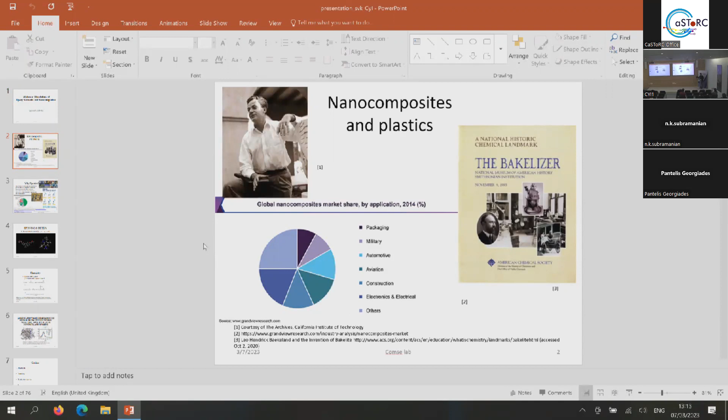But first, I would like to say some historical points. Yes, sorry. Okay.

The first who introduced, at least indirectly, nanoscience and nanotechnology was the great physicist Richard Feynman, when in 1959 at Caltech, at an American Physical Society meeting, he gave a lecture titled "There's Plenty of Room at the Bottom," where he mentioned the advancement of science and technology if we were able to manipulate molecules and atoms. In his opinion, one day humanity would be able to put the whole Encyclopedia Britannica on the head of a pin.

The scientific community agreed that that was the historical point where nanophysics and nanoscience were born. Another historical point is the first mass-produced nanocomposite, which, according to the American Chemical Society, is bakelite, invented by Leo Baekeland in 1907 in New York, when he invented the condensed polymer of formaldehyde and phenol. Due to its amazing electrical and thermal properties, it was a must for everyday household needs.

Now, as you can see from the chart below, the nanocomposite market is huge, and it is linked with a very specific, wide range of applications like military, automotive, packaging, electronics, and many more.

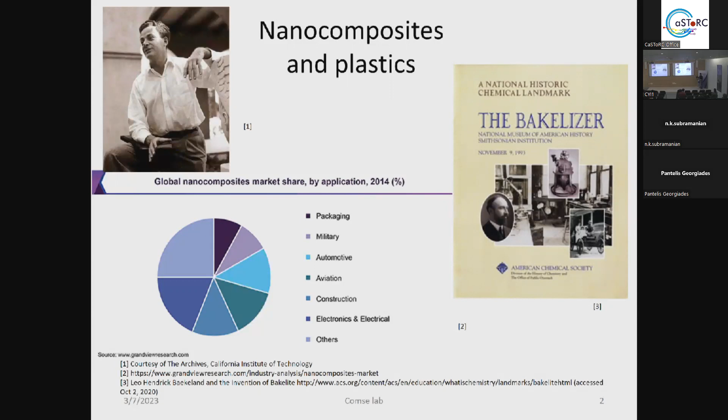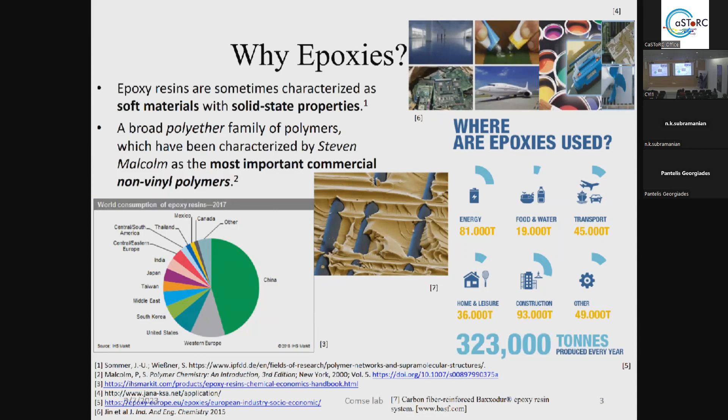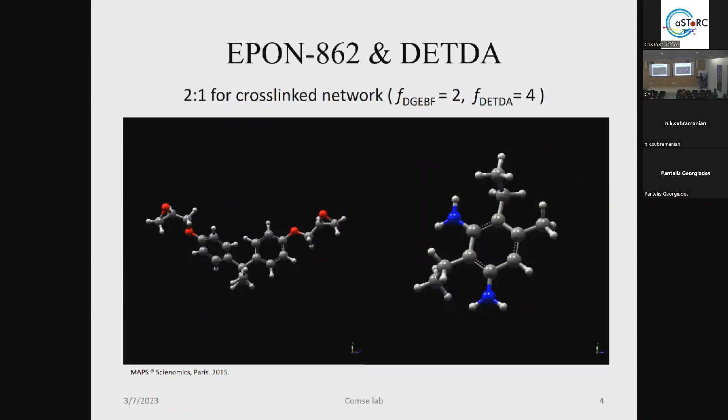Now, this is the epoxy molecule that we want to polymerize, as we say in polymer physics. But in epoxy resins, the polymerization happens with the help of another molecule, the hardener, in order for the cross-linking process to happen. As a hardener, I chose this molecule, called DETDA, and it has functionality 4, due to the 4 hydrogen bonds that the amine types are able to create.

You can see here the chemistry of the cross-linking process, and that it is a 2-step reaction. First, the amine of the hardener goes to the epoxide, and they form the first step of the subnetwork. The epoxide edge opens and takes the amine, and then this product links with another epoxide of another epoxy monomer, and that's why we need 2 monomers for 1 hardener. The ratio is always 2 to 1 because of the functionality 2 to 4, giving the first subnetwork after the 2-step reaction.

Of course, this happens again and again in order to have a big, fully cross-linked network. Now, the first step of the research was to study a fully cross-linked network and to explore the topology, the elasticity, the dynamics, and the structure of this network.

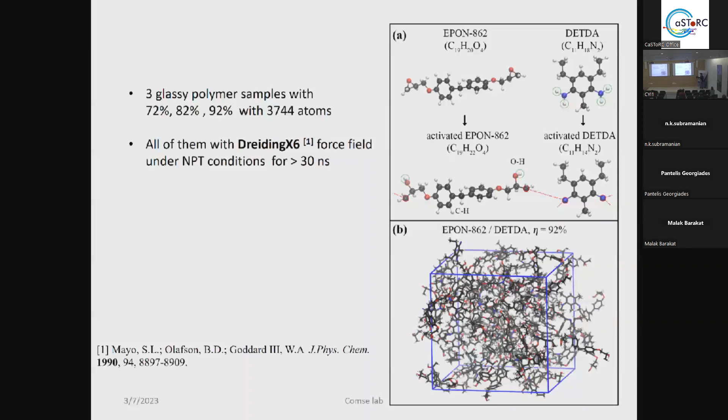Also, yes, also the cross-link degree and the hardener. No, this is the problem. And in computational studies, another problem is to find the same force field, and of course the same parameters, as I told. So at the end of the day, it's very difficult to find exactly the same system in terms of chemistry, in terms of cross-link degree, and in terms of force field if we're talking about computational systems.

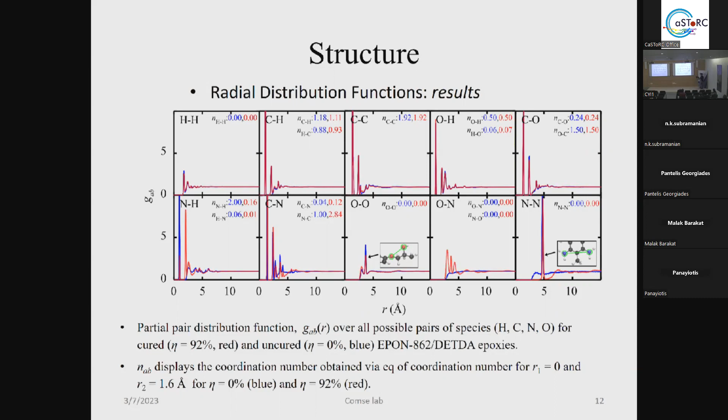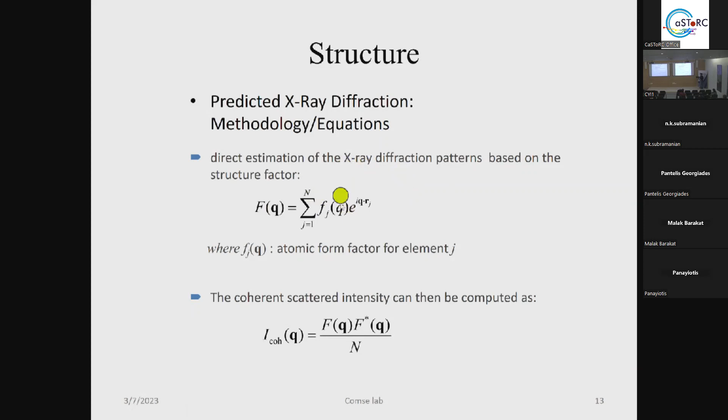And after that, taking into account the partial g(r), we were able to calculate the theoretical XRD diffraction. Now, because of the small system size due to the molecular simulation, we did that with 2 different methods. The first is the direct estimation of XRD, taking into account the structure factor. And the second is taking into account the partial g(r), as I told you before.

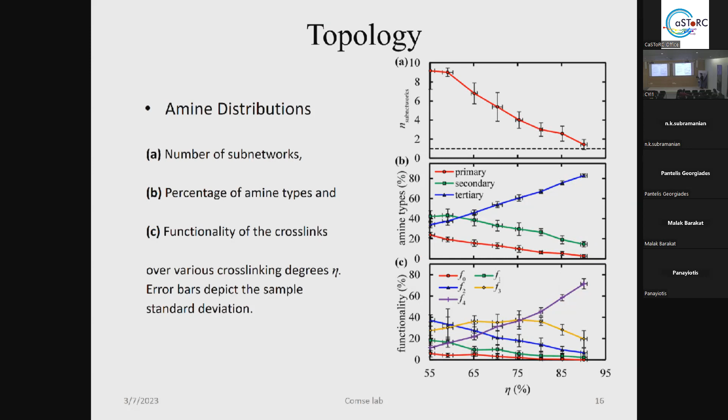Afterwards, we calculate the elasticity of the system in 3 different ways, in order to decrease the error bars because of the small size of the system. With volume fluctuations, with tensile stress-strain experiments, with 3 different strain rates and 3 different directions in order to take out the errors as far as possible, and with the Parrinello-Rahman method.

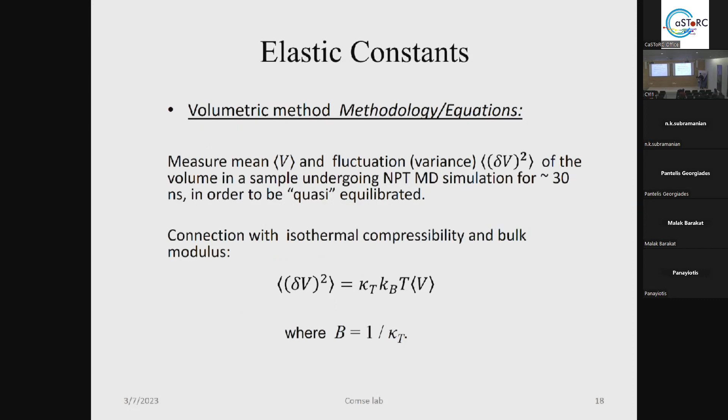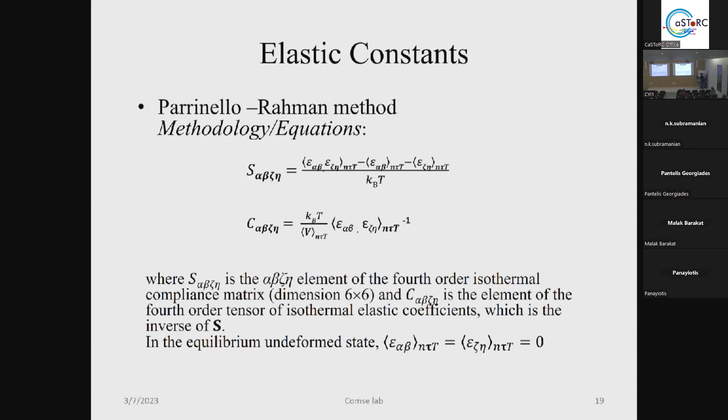As regards the volumetric method, we took into account the fluctuation of the volume, and from this we were able to calculate the isothermal compressibility, and from this the bulk modulus. As regards the Parrinello-Rahman method, we calculate the compliance matrix through the strains of the system in the equilibrium undeformed state for more than 70 nanoseconds of molecular dynamics equilibration run. In that case, these two parts go to 0 because of the undeformed equilibrium state, and thus the compliance matrix takes that form and is more elegant and easier to solve.

Of course, we... excuse me for that, I don't know how to, okay.

Of course, we took into account the Lamé equations in order to get the bulk modulus and shear modulus from Parrinello-Rahman, because from Parrinello-Rahman and the compliance matrix we get only the Poisson ratio and Young modulus. Here you can see all the values from all the methods for these 3 different systems, 92, 82, and 72. In bold, I have the agreements between the methods and the experimental.

We can see, for example, that at 72% we have an agreement in Young modulus and Poisson ratio between the stress-strain and the Parrinello-Rahman. Also we can see that here, especially in the Poisson ratio, at 82%, and happily also in the shear modulus in the fully glassy system, between Parrinello-Rahman, stress-strain and the experimental.

We know that the Parrinello-Rahman method is a very sensitive method because it is a statistical mechanical formula and transfers the errors that we may have from the thermal fluctuations to the values. And after this, we have bigger errors from the error propagation. Why am I saying all this? Because in some cases we can see extremely high errors like this. For example, it's double the value. And this happened because of the very sensitive method that transfers this sensitivity through the fluctuations, and of course the very small size of the system.

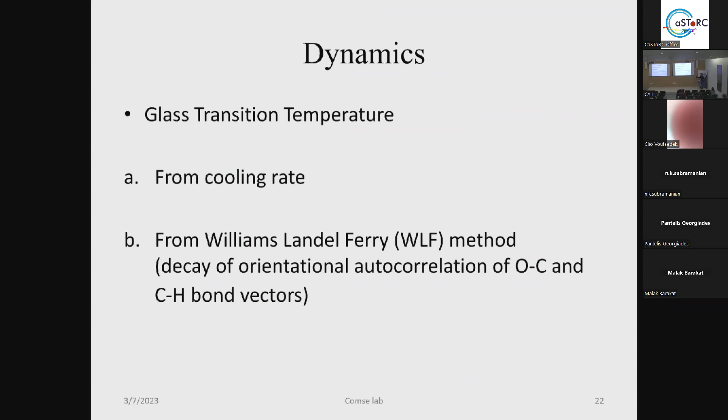Also, we studied the dynamics of this epoxy network in two different ways, with the cooling rate and with the WLF method, taking into account the correlation functions of the vectors. The cooling rate method we used was to cool the system at 1 Kelvin per 200 picoseconds, which is of course a brute force method compared to the experimental way people do in their laboratory, about 1 or 10 Kelvin per minute. But people doing simulations know that the experimental rates are very, very slow, and we weren't able to reach them.

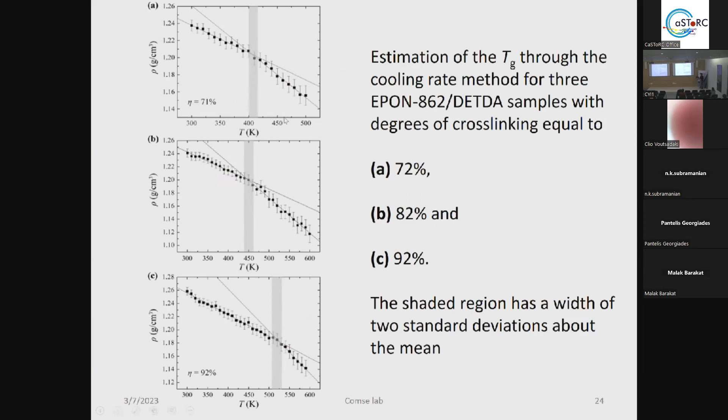So in order to have reasonable times, we used that brute rate, and compared the density versus temperature after that. We can see here the three different plots for the three different systems, and we can see the change of the slope here with the shaded region, the width of two standard deviations.

After that, we did it in a second way, the WLF method, taking into account the first and second Legendre polynomials of the epoxy segments OC and CH, in order to see how these two bond vectors behave, and so to have a bigger picture of the dynamics of the system.

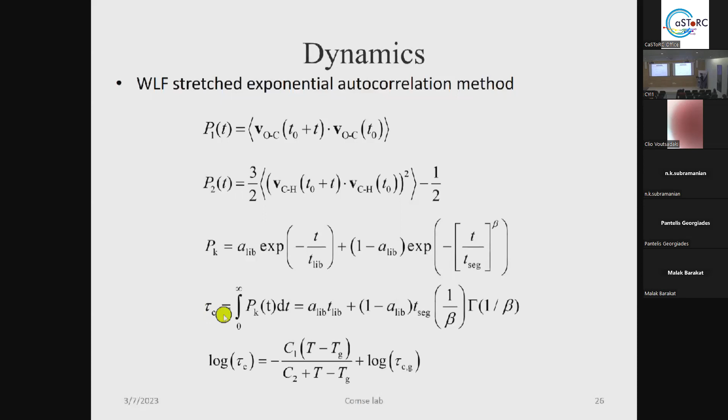You can see here the first and the second Legendre polynomials of the vectors that we take into account, and from these we take parameters in order to parameterize this equation, parameters like a-lib, which is the parameter for libration of atoms around their skeletal bond, and the characteristic times of this libration, which are t-seg and beta. From these parameters we calculate the relaxation time, and from the relaxation time we calculate the Tg.

So here we can see all the results for the two different methods. You can see here the WLF for the two bonds, and here the cooling rate results. And after that I applied the Ferry approximation, which was introduced by J.D. Ferry, who said that from these brute force cooling rate methods we may have some errors, typically numerically speaking. In order to minimize these errors, I applied the approximation, which depends on the order of the cooling rate, in order to have the final values with the least possible errors.

And of course, at the right, you can see the experimental values. Interestingly, with the brute force cooling rate method we have quite good agreement with experiment. In contrast, the WLF method, although it has qualitatively good results, quantitatively has some variance from the experimental values, and the reason is again the sensitivity of the method. The more sensitive the method, the bigger the error transferred to the final values, especially with small systems like the ones we had.

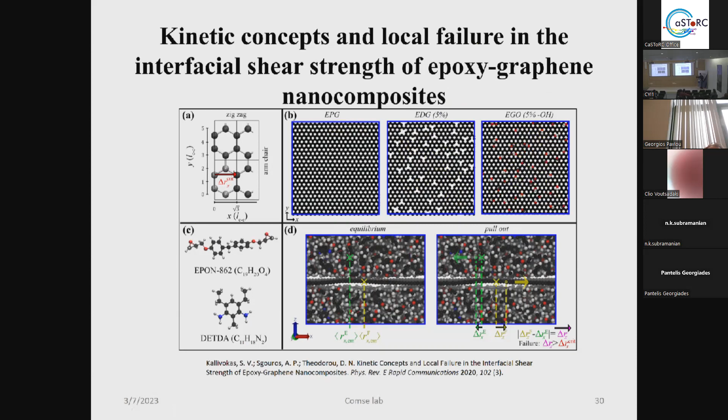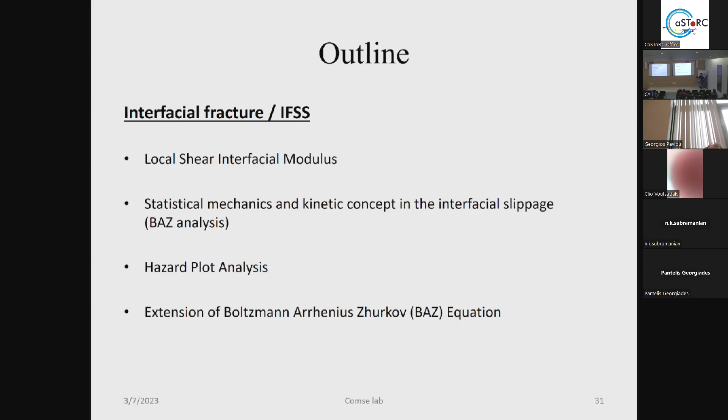The main target of this research was to calculate the interfacial fracture, or what people doing fracture mechanics call the interfacial shear strength. We took these 3 systems at 82% crosslinking degree, with bigger systems this time of more than 15,000 atoms, with Dreiding exponential-6 as a force field, and we equilibrated for more than 70 nanoseconds under NPT conditions.

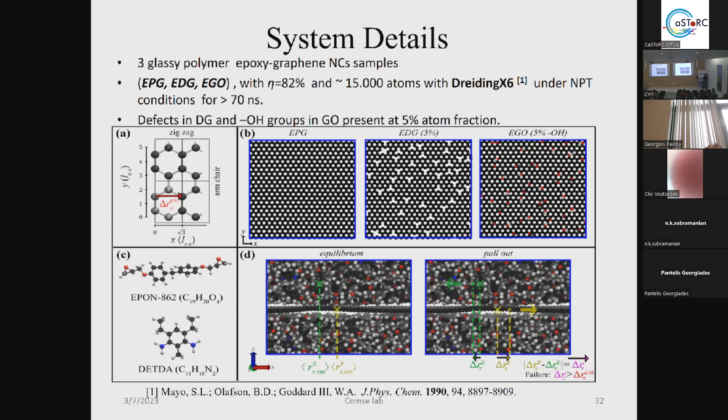The first thing we were interested to see was an interfacial constant that people doing experimental fracture mechanics, especially at the macro scale, measure: the Winkler modulus, which is a modulus that explores the interface of 2 different systems. Usually, one finds this constant in geomechanics or civil engineering systems.

So we were interested to see if this interfacial constant would be able to see that here. But here, of course, we have a molecular system and a different point of view. So we constructed this Winkler molecular-level constant the way that I show you here, and we define this constant as the local shear interfacial modulus. It depicts, let's say, the adhesiveness of the interface between the epoxy and the graphene. And we calculate this for different temperatures and for the 3 different systems.

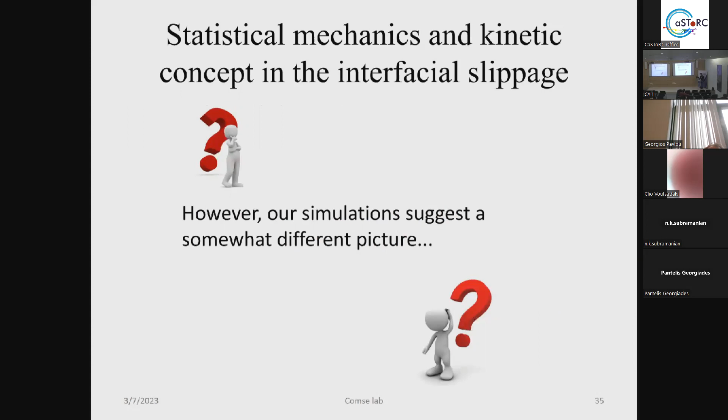I mention this because we had a somewhat different picture of the system. The limit time, the tau lim that Zhurkov saw, was in the order of 10^-13, the oscillation of atoms. But we saw, at least in the epoxy pristine graphene, 2 orders of magnitude bigger. So we saw a numerical, let's say, disagreement.

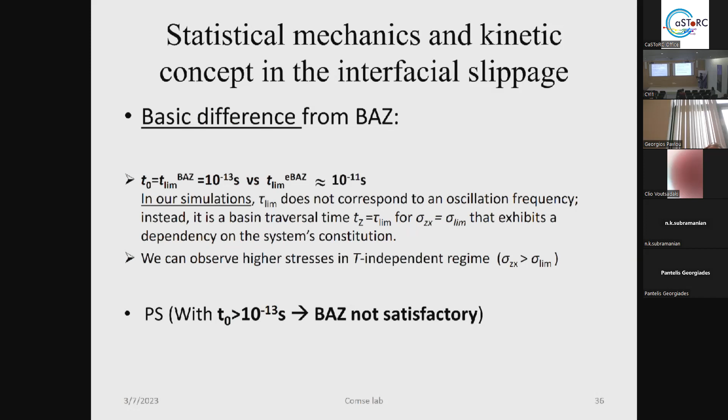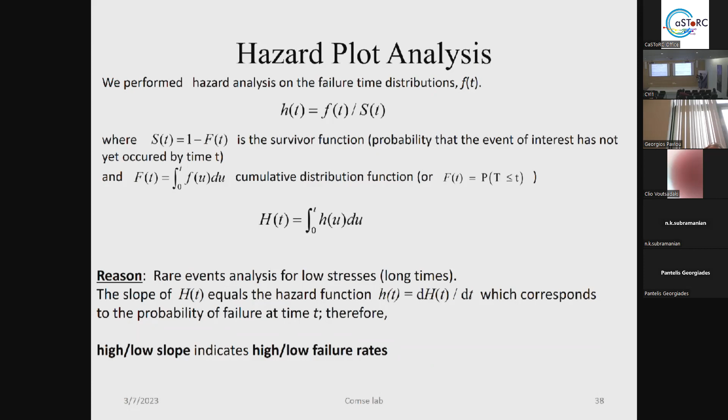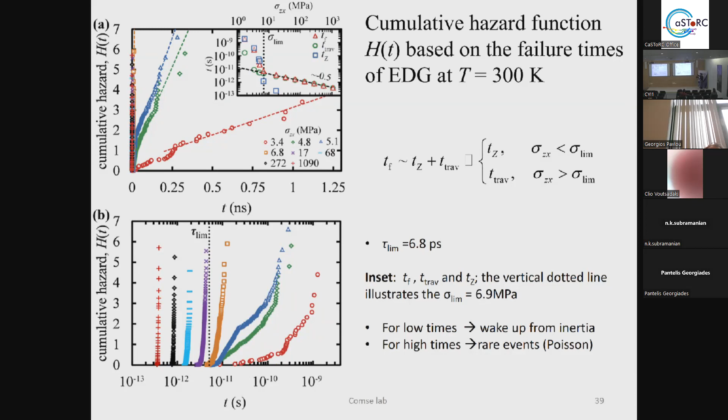So what we proposed is that, depending on the stress, if you have stresses smaller than the sigma lim, you have an exponential behavior of the time of failure, adding, of course, the numerical difference, the tau lim, that we have in contrast with Zhurkov. And in the second regime, we have a linear response, which depicts the accelerated motion: as far as you put high stress, it has an accelerated motion because of the totally destroyed interface.

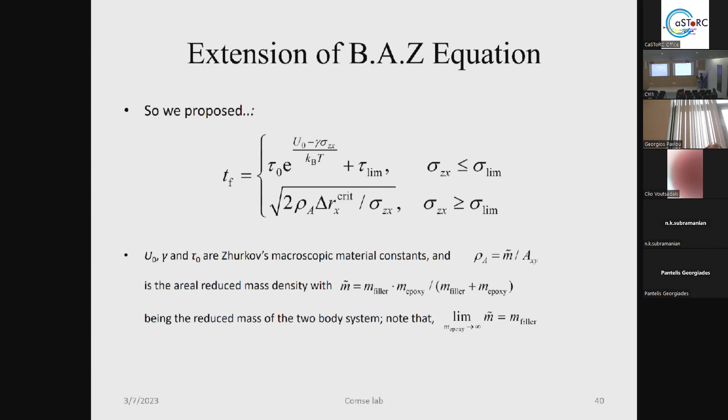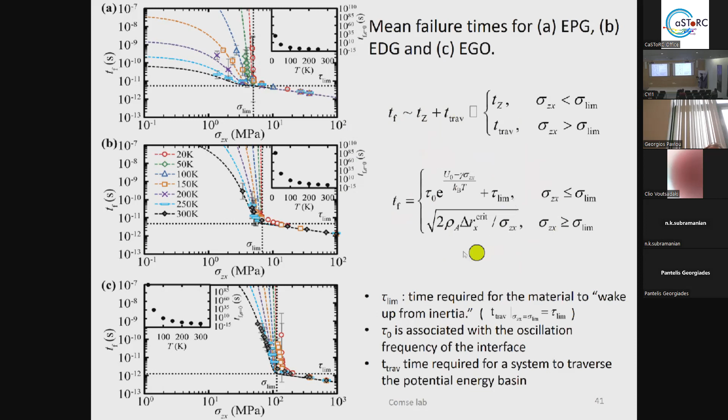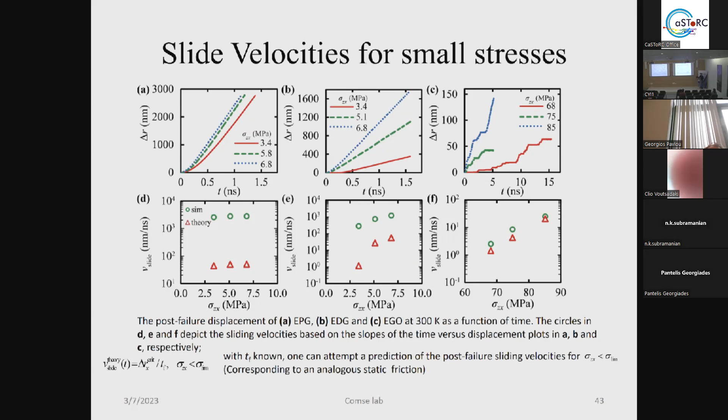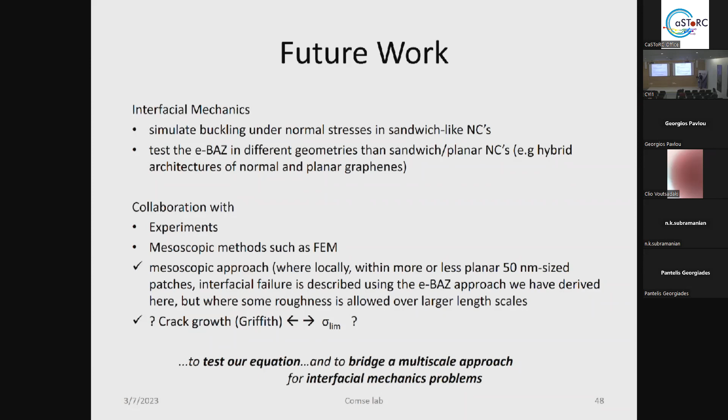Now, my wish is to extend this method to explore more geometries, other chemistry and other chemical systems, and of course to do that collaborating with experiments and mesoscopic methods like finite element methods, in order, at the final chapter of this problem, to see if from these things we'd be able to see the crack propagation from the Griffith theory, and if this methodology that we made is so powerful, let's say.

At that point, I would like to thank Professor Theodorou and Dr. Aris Gouros, with whom we did these works, and of course Dr. Stefanos Anogiannakis and Professor Michalis Kavousanakis for the helpful discussions, and of course the Eugenides Foundation for the scholarship I had in my PhD. Thank you very much.

Okay, so thank you for this presentation. You're welcome. Actually, I have two questions. Yes. The first question, if you go to slide 22, when you compare the theoretical, it's not theoretical, sorry. 22? Yes, here. Here, maybe? Yes, here. Okay.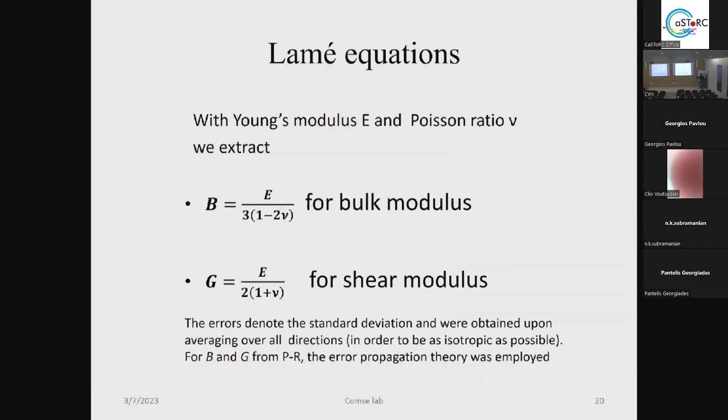As you can see, we did it with three different rates, from 7 to 9 in second to the -1. So we took these three strain rates, but we saw that we estimate on the 10 in the order of 8. So the answer is 10 in the order of 8. But we did it with three different rates.

And the results for these three different rates are the same? No, we have some variations, but we agreed that the third, which doesn't appear here, the 5 times 10 in the order of 8, is the best rate. The best in what terms? In terms of the time of the calculation, it's not 3 months for each calculation. Which one is closer to, for example, Parrinello-Rahman? Which strain rate? The 10 in the order of 8. Yes, it's equilibrium.

So I'm saying again that we did it with three different strain rates, and of course I have the values if you want to see, but after that, we saw that combining reasonable calculation time and reasonable values, the best is 10 in the order of 8, and the results that you saw were 10 in the order of 8. Okay.

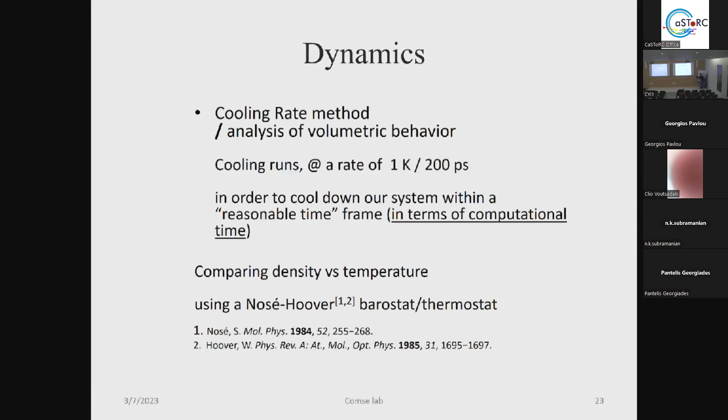Just another question. If you go please to slide 33. So you compute the stress after you apply the force here, right? So sigma equals F over the average area, right? So my question: how sensitive is the computation of this coefficient G? If you change F, for example, do you get the same value of G?

So, for example, you have a specific value of F, and then from this F you compute the delta R, right? And then from the ratio you get G. So my question: if you change F, will you get the same value of G? If I understood the question right, the answer is this is what we're doing. We change the shear stress, and thus we change the F, right?

Yes, exactly. So you apply force on the graphene, and from the force you compute sigma. Then delta R, then epsilon, and then you obtain G. If you change F now, for example use 1.1 F, increasing by 10%... But that was the way we calculate. We changed the F every time. So this is from the slope? This is from the slope between sigma and epsilon, not the ratio between sigma and epsilon.

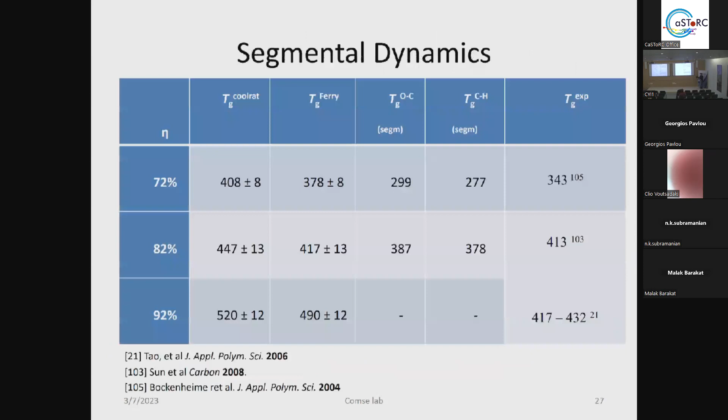Here? Yeah, experiments, they don't use... The medium, you mean the hardener? No, they don't use solvent. The experimental way, you mean, right? In the experiments, they take the resin as a melt, as a solvent, okay? So we could agree that this is the solvent, and they put on the resin the molecules of hardener, and they mix it, and they increase the temperature, then they decrease it.

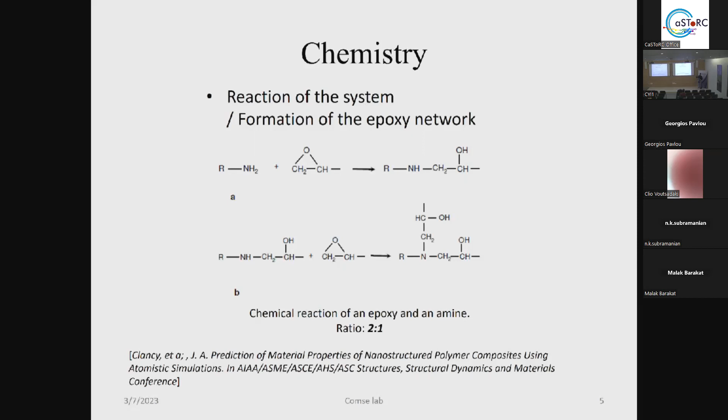Yeah, I told you they have some temperature changes, and precisely you have some cycles of temperature. You go very high and then you cool it, then you increase it, then you cool it again and again. This is the experimental way. So the solvent somehow is the resin; they do not mix anything else. They mix only these two things. Yes. We didn't show monomers. We saw a fully glassy system with the interface.

If we show hydrogen bonding, you mean? If we show any interaction in terms of chemistry? Of course, they may interact with van der Waals, which are the weakest. But because they are the weakest, the van der Waals can break very easily. Of course, yes, but all these are very weak in contrast to the force that we apply.

No. Generally speaking, they are strong, but the Coulombics that may appear here, you have some polar groups that are sparse, and so the total amount of interaction they may have, in contrast to the brushes of the OH, is statistically speaking very small compared to the force that they induced. Of course, Coulomb interactions are very strong. And so they cooperate somehow.

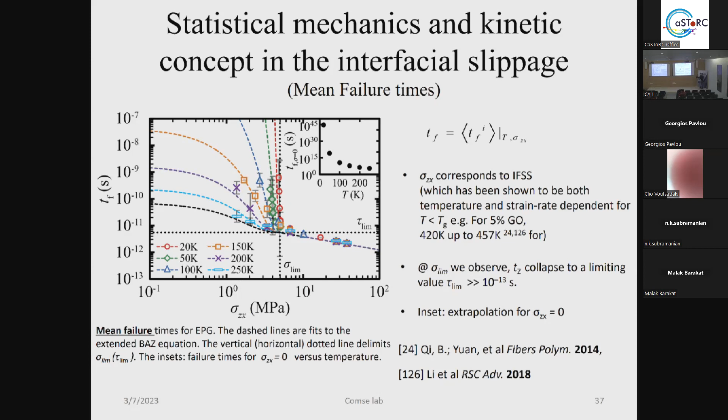Thank you so much for the presentation. You're welcome. One comment on the beginning of the presentation, when you reported some factors you showed. Here? Yes. Change. Deltas, you mean? The difference of the density.

The fracture energy. For example, if you want to see a void in your network, right? In the epoxy glass network without this nano. Okay, yes. To see the rupture. This is what we're trying to see now with a PhD student. Via molecular simulation, it's extremely hard, because you have to introduce the rupture of the bond, and with classical force fields this is not very easy. We also have advanced force fields like reactive force fields that break the bonds, but unfortunately the computational times are extremely slow to see a rupture, like the beginning of a crack propagation.

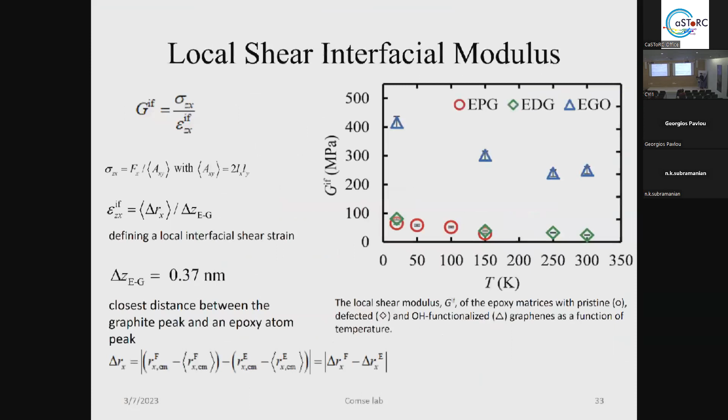Here, you have this limit. You mentioned that it breaks and then it's stuck again. Stick-slip, yes. And then it breaks again. So does it start at the same point exactly? No, this is random. It depends. You apply a force or a shear stress and you pull it out.

As we can see from the video, it breaks. The stress at the point of failure is the interfacial shear stress, and this is the interfacial shear strength. After the failure, the graphene starts moving. But randomly, when the polar groups, metaphorically speaking the brushes, the OH groups of the graphene, meet again, the graphene will stop again. So it's a stick-slip. The answer is no, it will not stop exactly at the same point.

Because I noticed that this yellow atom comes again to the same position. No, it is a video. First of all, you have the periodic boundary conditions, and second, it is the video that stops. You can see it breaks. It's glassy? Yes, it is about 82% cross-linking degree, so it's totally glassy.